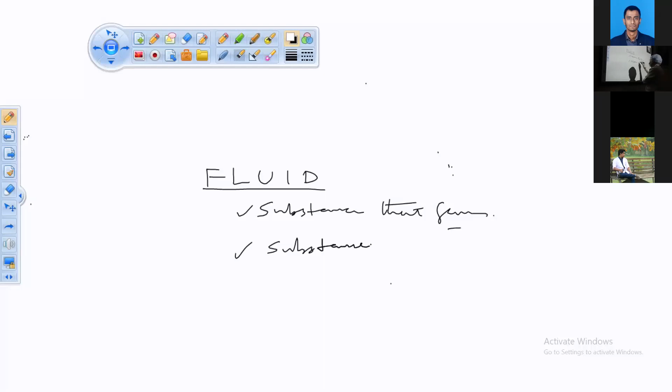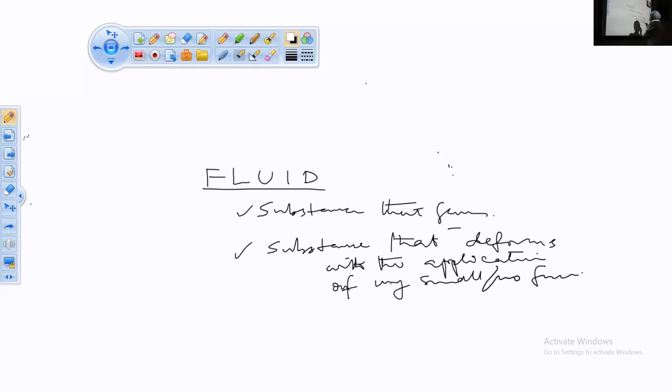That deforms how? With the application of very small or no force. That is, fluid is a substance that gets deformed if you apply a very small force. Sometimes it deforms with the application of no force. It deforms, that flows. Deforms means it gets deshaped, it is going away, sort of things. So, substance that deforms with the application of very small or no force, that substance is called fluid.

Okay, right. Now, fluid mechanics - this fluid and fluid mechanics. So what is fluid mechanics? Fluid mechanics is a science dealing with the behavior of fluid. That is called fluid mechanics. So now you know what is fluid, what is fluid mechanics. Okay.

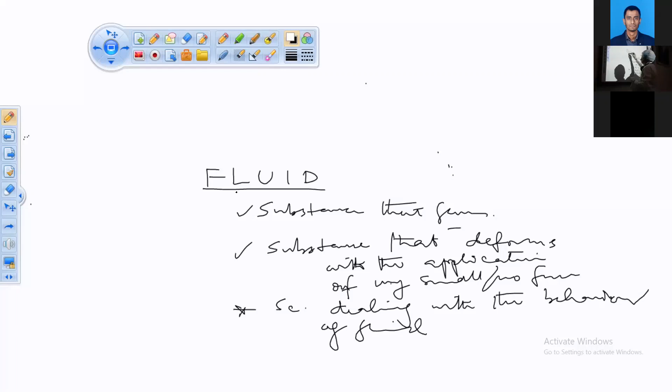Now let us elaborate it a little bit. Let me erase this. Will it erase? Okay.

Now let's come back to fluid again. Fluid, it could be liquid, or fluid could be gaseous. Liquid means it could be water or any other liquid. When we say that fluid is liquid, it could be water, it could be other liquid as well, or it is gas.

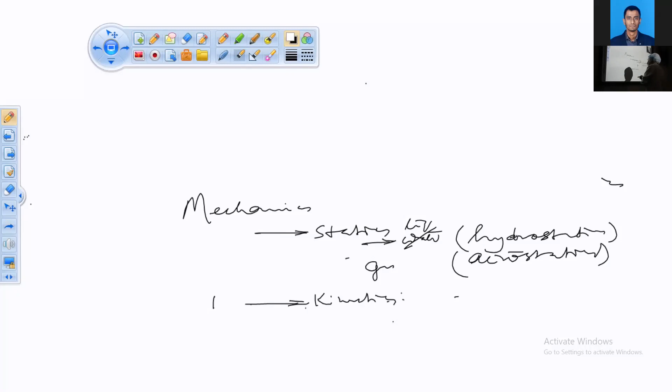Okay, now then say fluid kinematics. What is kinematics? If we deal with the velocity, acceleration of any fluid, compressible, incompressible etc. That is, here the fluid was in static condition. Now, if the fluid is moving with certain velocity and acceleration, we will say that, well, we are dealing with fluid kinematics. And another we say dynamics.

Fluid dynamics. What is fluid dynamics? Fluid dynamics is when the fluid is moving with certain velocity, acceleration, as well as it is encompassing forces causing the acceleration. That means when you consider the force, the velocity, the acceleration, all in the same domain, we will call it fluid dynamics.

So mechanics is consisting of statics, kinematics, and dynamics. So when we say fluid mechanics, that means we are dealing with fluid statics, we are dealing with fluid kinematics, we are dealing with fluid dynamics. Well, we segregate it, we classify it for analysis purpose, but these are the different classifications.

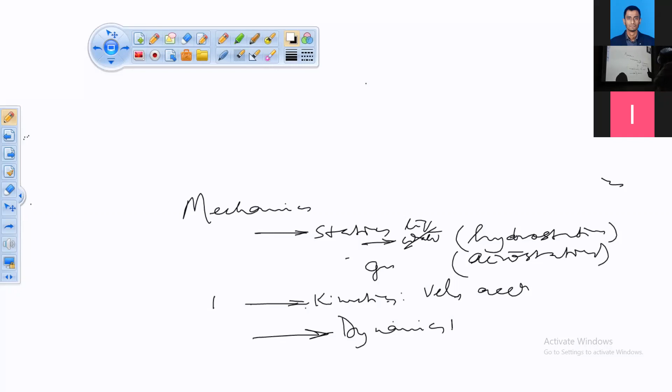Okay, now so on a surface like this, say on a tabletop, a metallic top, whatever it is, say you put a small drop of water, a drop of water. When you put a drop of water, well, as soon as you put it, this spreads out.

This will be spreading. Now, in place of water, say if you put a drop of oil, that will also spread out. But this, as you can notice, takes probably a little bit more time. If the spreading here takes 0.1 second, this might take say maybe 0.2 seconds to spread out the same amount.

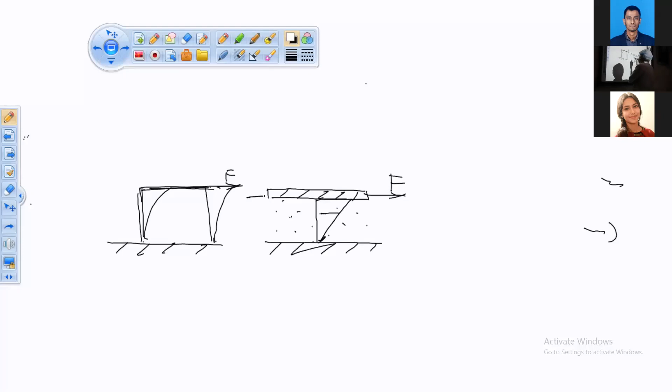Now if you apply a force here, the liquid at the bottom will remain there. Liquid at the top will move along with the plate. Liquid somewhere in between will also move, but with a smaller displacement. So we can draw a velocity diagram. At the bottom surface, the velocity is 0. This is a thickness T. We can also give a coordinate system: this is the X coordinate and this is the Y coordinate. In the Y coordinate, the gap between the moving plate and the fixed surface is exactly T.

So the fluid in between is getting deformed, coming in contact with the moving plate. The plate moves, the top fluid moves, the fluid a little lower also moves, but it is 0 here. So we are calling it a velocity distribution: maximum velocity at the top, lower and lower, and lowest at the bottom. A velocity distribution something like triangular. Not necessarily triangular; it could be like this also, a parabolic velocity distribution of the fluid between two plates. One plate is moving at the top, the bottom is a surface.

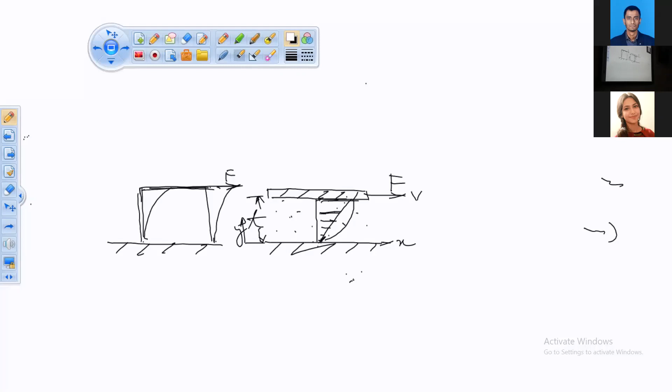There will be a velocity distribution. That means the velocity at the bottom will be 0, the velocity at the top will be maximum, and it changes from maximum to a little lower, lower, and the lowest. So we call it velocity distribution. Along the ordinate from the bottom surface to the moving plate surface, there will be a fluid velocity of this kind, triangular, linear, or parabolic.

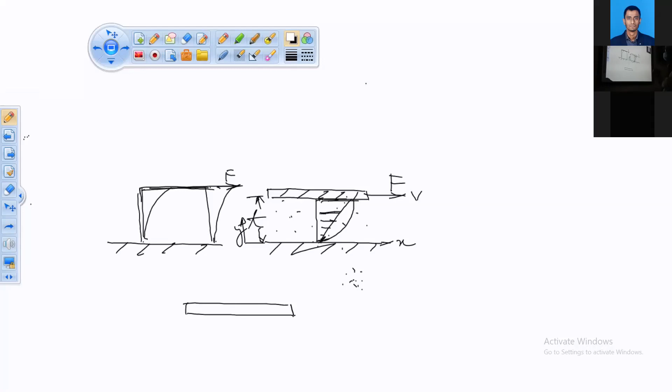For example, say a shaft, a round rod. It could be a metallic rod, whatever it is, circular cross section, long; we call this a shaft. Now what is a shaft?

Shaft, and the other one we are calling a rod. So a rod can become a shaft depending on how you use it. Say you have a ceiling fan. If you look at the ceiling fans of your classroom, or the ceiling fans at your home, the ceiling fan is held by a rod. That means the job of that metallic rod is just to hold it. So we will not call that a shaft, we will simply call it a rod.

But if the rod is used to, say, transfer power, for example, if this rod is put in between bearings on two sides, so we put two bearings at the two ends, and within the bearing we are putting the shaft, and let us put some fluid inside, lubrication, and the shaft is, say, rotating.

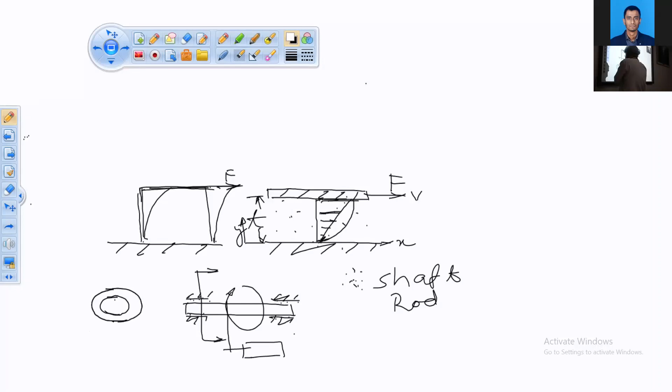That means we are taking a sectional view here. And if you take the sectional view, it will be something like this. Say the shaft, drawn round, a bit larger. This is the shaft, the middle one, and on top there is the bearing. This is known as bearing.

You will study this in machine design in third year. This is called a bearing, and there are classifications: journal bearing, ball bearing, roller bearing. So this is a journal bearing. The rod inside, the shaft: in this case we will call the shaft a journal and the outside one is a bearing. That means the whole thing is called a journal bearing. So we are talking about a journal bearing, and in between there is fluid.

We are teaching fluid mechanics, so we brought fluid in. So a journal bearing means a shaft is rotating within a bearing, and there is some lubricating oil in between the bearing and the shaft.

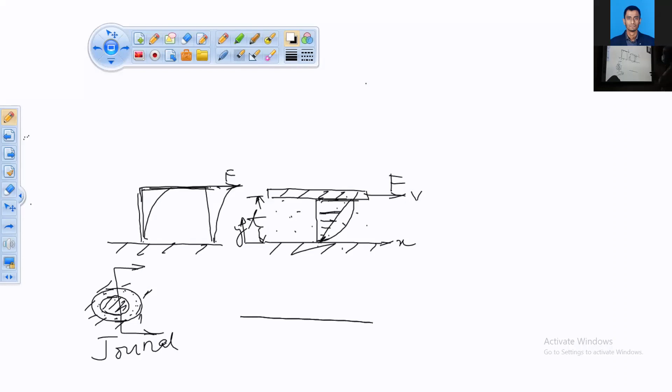Okay, so we have the journal bearing. Take a section, cut a cross section. You cut it and open it up. So if you open it up, the bearing part, the outer part, would be a surface like this.

Mechanical drawing is like this, right? Yes sir. The outer part will be like this, and the inner part, which is moving, is something like a flat plate, moving with some velocity v, and in between there is some liquid. So as a mechanical engineer, when you consider a shaft moving within a bearing, it is something like this. This is what we were trying to say at the start: this one is a resemblance of this.

The x coordinate, y coordinate, the gap between the moving plate and the fixed plate is t, etc., moving with velocity. Okay, now see the force that is required. You are pulling it like this with a certain force, so this is moving with velocity. That means the velocity would be more if you apply a bigger force. So in other words, force is proportional to the velocity. That means if you want to move it with a higher velocity, you will have to apply a bigger force.

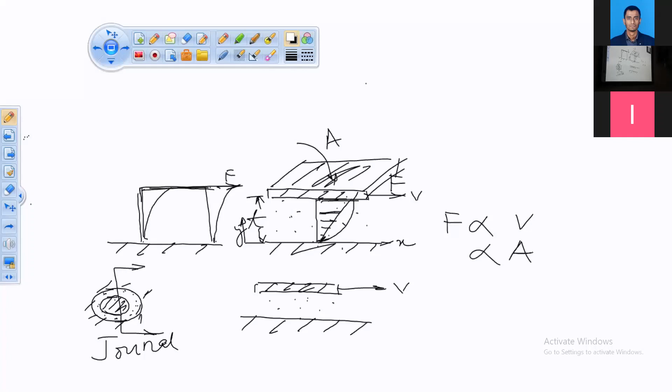So simple. Now, if the plate is just placed on the surface, no gap, that will be total hard, solid friction. That's why we put some lubrication. In other words, if the gap is smaller and smaller, you need bigger and bigger force to move at the same velocity. If the gap is bigger, the force required is smaller for the same velocity. So you can say that force is proportional to the inverse of the gap.

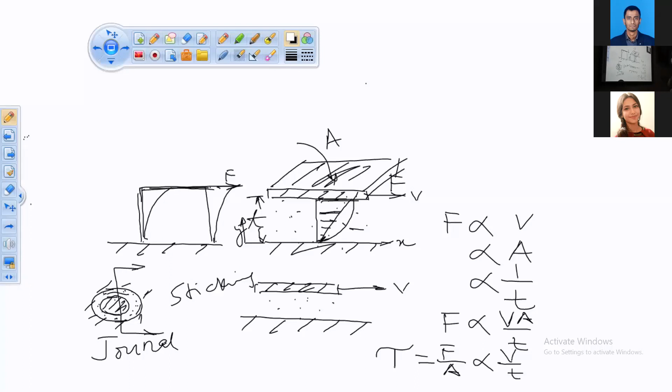So different fluid will cause different type of friction, and force divided by area, force applied for pulling it, area, the underside area of the plate, and this is giving, we are calling it frictional stress. Frictional stress, tau, frictional stress, or sometimes this is also known as shear stress. Same thing, frictional stress or shear stress, fluid shear. So this stress tau is a frictional stress or shear stress. So we will simply call it our shear stress. So tau is equal to this.

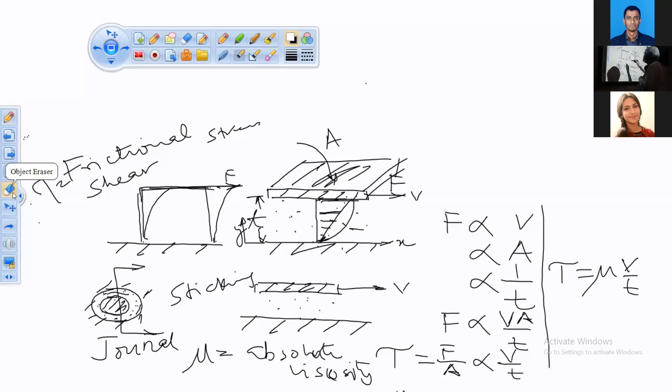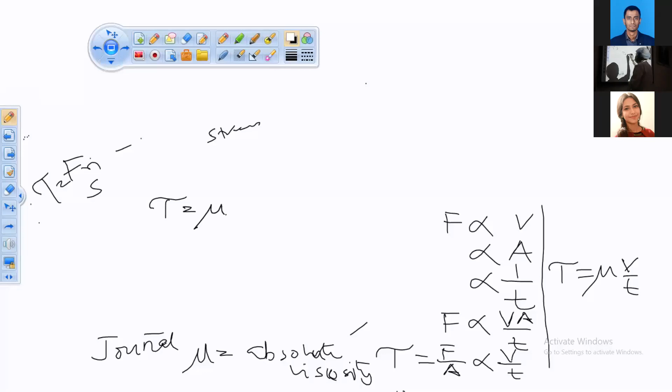This is called kinematic viscosity. Absolute viscosity, kinematic viscosity. If you know the density of the fluid and you divide the absolute viscosity by the density of that fluid, you can get the kinematic viscosity of the fluid, nu and mu.

Now see the fixed plate and the moving plate, fixed plate, and this is T, and this is the velocity distribution. Zero velocity, maximum velocity. This is V, this is zero velocity, and this is y coordinate. Y, this is x. This is the velocity distribution. That means velocity is slowly increasing. So this is small v.

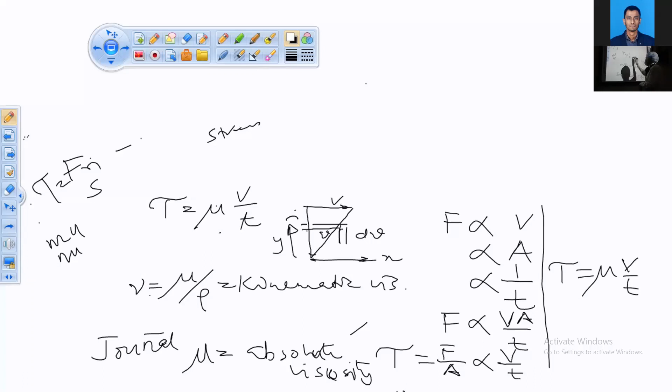This is increased by, say, dv. The velocity here, the increase, this small increment, we will call it dv. And that small increment in velocity is caused because of the change in the height. This one, we will call dy. So for a change of coordinate dy, there has been a change of dv. So you can write something like dv dy. This we call velocity gradient. Velocity gradient, slope. So in differential form, this y is t, thickness.

You can also write this one as mu dv dy. Same thing. The shear stress is given by mu v by t. V is the velocity of the top plate. T is the thickness between the fixed and the moving plate. You can also write in a differential form, shear stress tau is equal to mu dv dy.

Understood? Yes, sir. Yes, sir. Okay, good.

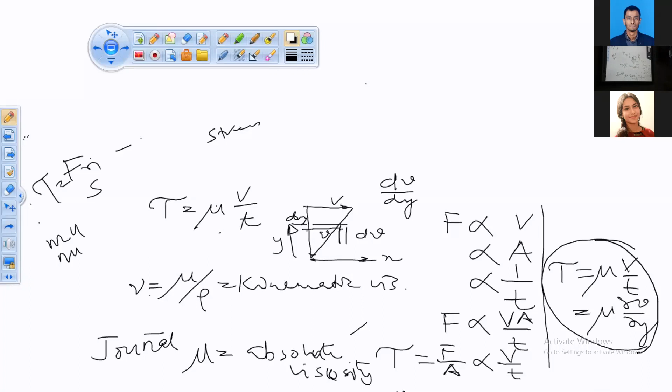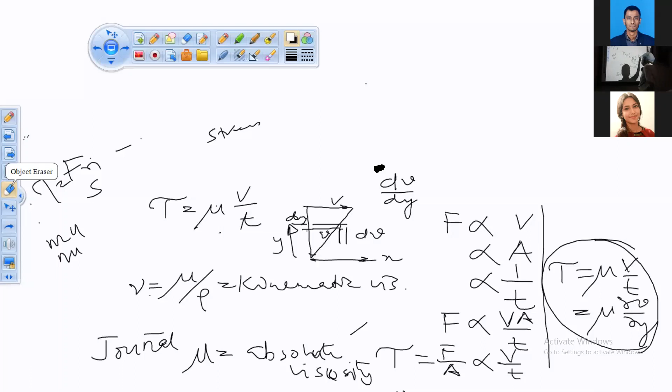Remember this. So we have derived a formula something like this. You must remember this. Very simple formula for shear stress, fluid shear stress, mu dv dy. Okay. Good. So you have got a small formula for shear stress, v by t, mu dv dy. So simple.

If there is any fluid like this, we will call that fluid an ideal fluid. That means the ideal fluid has got no viscosity. That's why no viscosity. That is, even with zero shear stress, it is spreading. No viscosity. Viscosity zero means shear stress zero with the velocity.